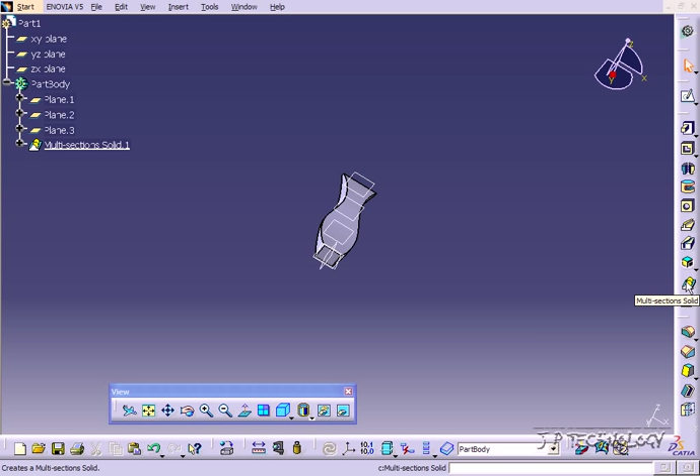Like the last few tutorials, we're going to be using the multi-section solid function. This part is pretty much the same as the last tutorial, I just cleaned it up a little bit. It's the 4 sections put together.

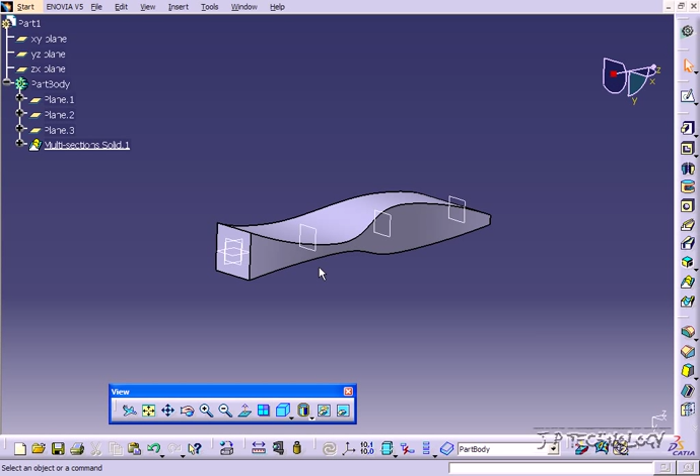For the advanced multi-section solids, we're going to add a guide profile for all these to follow, because right now they're just following a straight line and merging together. We're going to add a bit of a curve and a bend going up and around. So to start off, we're going to right click and delete this.

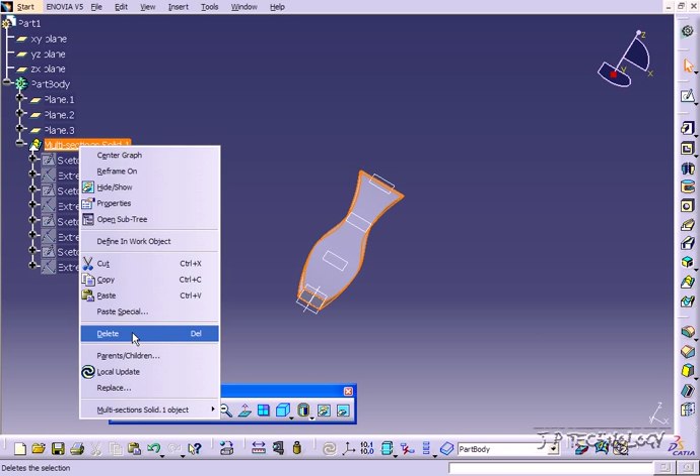We're going to unselect the aggregated, click OK. So now we're still left with these sketches here. What we're going to do is sketch on this plane and slowly build all these sections together to give it a different kind of flow and curve. So let's click this plane here, click sketch.

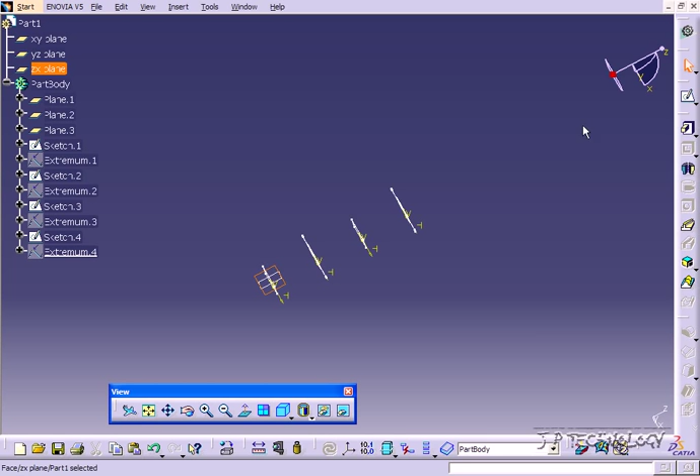What I want to do first is select each of these points here, press Control, and project them out, and make them a construction. From these points we're going to snap and bring all these together. First let's click the line tool and put some lines in there to connect these guys.

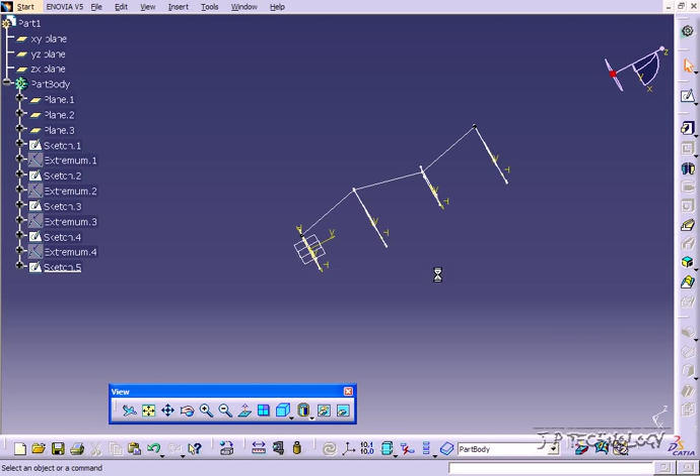Let's go back. This is just a basic one that we're going to be able to put together nice and quick, just to give you a feel. So let's click the multi-section.

Up here you're going to have to choose these sections, same as we did before, so choose all these sections. Then down here you choose the guide, so we're going to choose this as our guideline. Click preview, and it's going to give you a preview.

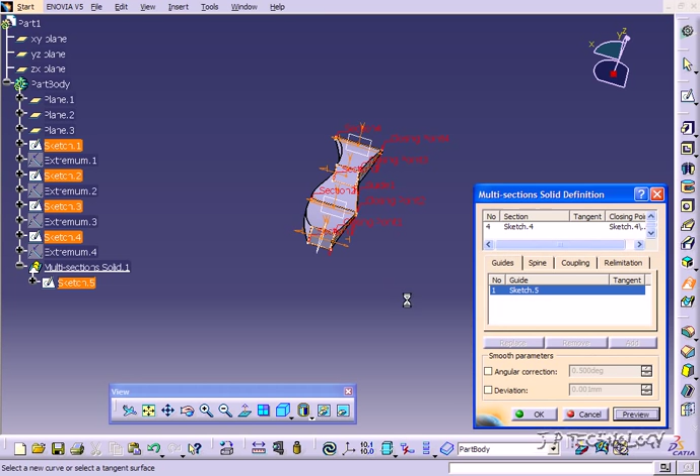This one's going to look just like the one we already made, so no big difference, it's just shifted over a tiny bit. Now click OK, and now we're going to change that sketch.

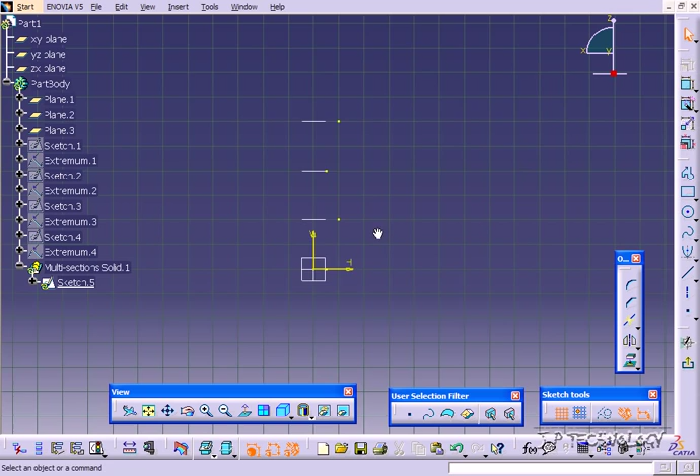Let's double click on this sketch here, and let's delete these lines. We still have those points, so let's click the spline tool.

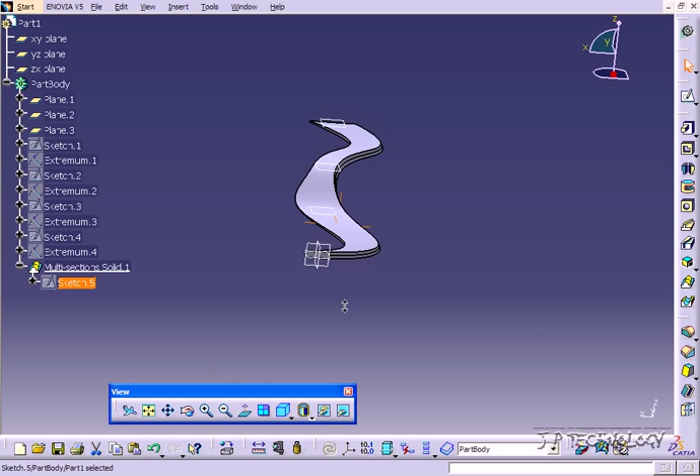Let's really kick these guys out and start moving them around. Let's go back, and now it's going to rebuild. In the rebuild you can see it's really moved those guys around with the spline compared to those straight lines we had, and they're going to follow that same path we just made.

Now I'm going to go back into this sketch, and what I'll tell you is that when you're doing these, especially with something like a square, you need to find a common edge or common point that you're going to whip everything around with. So what I did here is I always use the right edge point on top.

Using that, you're always using that edge to move it around. If I was to use, say, the left edge point and move them around, it might be too dramatic of a curve and turn, so it might fold on itself and the part might not come together at all. If you did a circle, you'd probably choose the center point of each one and whip it around from the center points.

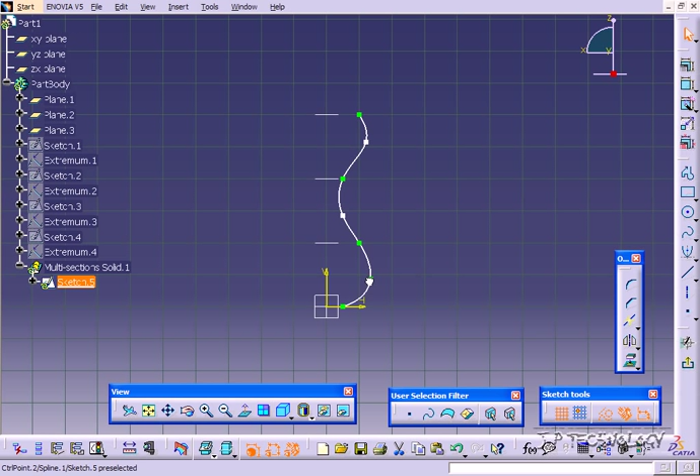So again, we're able to just play around with this, move these guys in a little bit, and we're going to have the same result. It's going to adjust accordingly to what the guide curve was there.

So with all of these multi-section solids, I've shown you the basic one, where we created 2 reference planes, created 2 sketches, and put them together. Then with the multiple one, we did 4 reference planes, 4 sketches, put them together. And now with this one, I've introduced the guideline curve for all of your profiles to follow along.

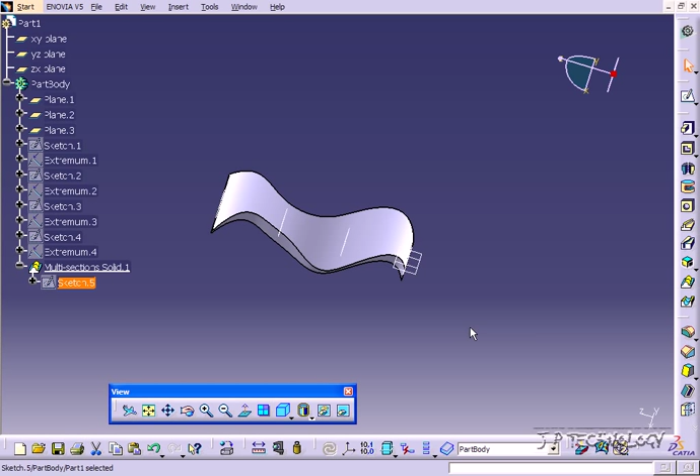So this is just all of them building up together, and now you're able to create profiles, create a line, and loft everything together and put it together. And that concludes our tutorial on advanced multi-section solids within Catia v5.